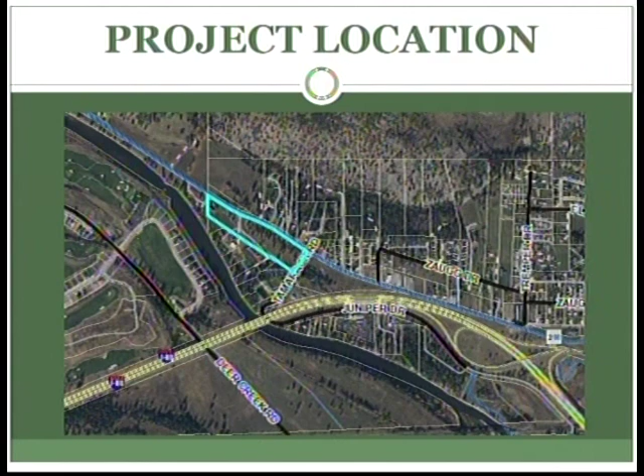We have our planning board hearing tonight, July 17th, and this will go in front of the Board of County Commissioners on August 9th. The project location is in Missoula County, out Highway 200. This would be just to the west of the West Riverside area, north of Interstate 90, and north of the Clark Fork River, as shown on the map on the screen.

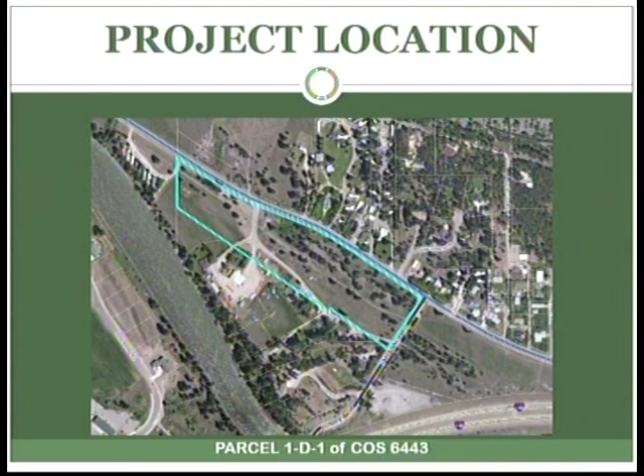Taking a closer look at the property, this is legally described as parcel 1D1 of Certificate of Survey 6443. We have just under 13 acres of property here for this subdivision. Access to the subdivision is provided by Highway 200 as well as Tamarack Road, the 2 nearest adjacent public roadways. Highway 200 is state maintained, and Tamarack Road is a county maintained public roadway located at the southeast of the property. You can see from this screenshot that the existing conditions are vacant on the property.

There has been some disturbance, as you can see. We do have Pine Grove Lane, a private named roadway that bisects the property currently and accesses some property to the south. Other than that, the primary improvements are mainly for utilities that cut across there, as well as some stock fill and material that may have been placed there associated with a construction business located just to the south of this property.

Proposed, as mentioned, is a 25-unit mobile home court subdivision. Mobile home courts do go through subdivision review. The result of this subdivision will be essentially a 1-lot subdivision with 25 units for lease or rent for mobile homes. A lessee would come in with their own mobile home and place it on the site. Because there are multiple of those on the property, it does trigger subdivision review.

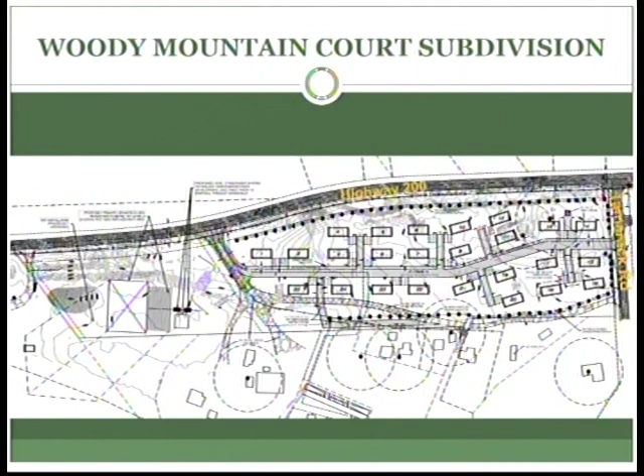Looking into the review criteria for subdivision requests, zoning and growth policy compliance would be our first one. This property is within the 1998 Urban Comprehensive Plan area, and that plan designates this property as primarily residential use at 2 dwelling units per acre for the maximum density.

There is a small corner of the property at the west edge designated as parks and open space, a pretty slim amount of the property. The rest, as mentioned, would be 2 dwelling units per acre, which is fairly characteristic with the surrounding residential development. The property is unzoned, so there's no zoning designation on it.

With 25 units on this property, it comes in at a density of 1.93 dwelling units per acre, so it's under that recommended 2 dwelling units per acre.

The 1998 Urban Comprehensive Plan lays out a framework for development patterns that says areas with a lot of community facilities can support up to 6 dwelling units per acre. Areas that have some facilities such as road infrastructure, schools, police protection, fire protection, and things like that could support up to 2 dwelling units per acre.

And then it goes down from there as you get more out into a rural nature of the county. So here we see that we do have roads adequately serving this property, and it is pretty close to local services. However, we don't have a community municipal water system or municipal sewer system located out in this general vicinity. So that's how the comprehensive plan derives that 2 dwelling units per acre is a pretty good number for this area.

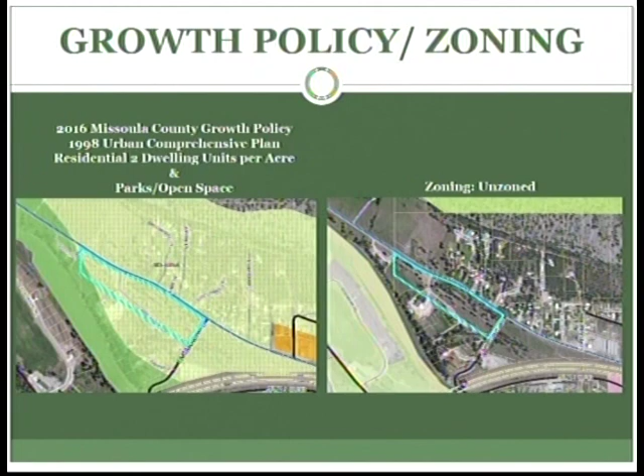Looking at ag and ag water user facilities, the site is mapped as prime farmland if irrigated. That soils information is derived from the NRCS web soil survey classification maps. There was a soil evaluation completed on the site in 1997, and the characteristics found were consistent with that NRCS mapping, that these soils could support prime agriculture.

As mentioned earlier, there is some soil disturbance on the property, so we found that some of those soils may not be the original soils on the property. It looks like there is some fill there, as well as the roads and utilities that have gone through, which have stirred things up quite a bit.

Agricultural use is currently absent from the property. We feel that it's been absent for most of the history on this property. The Urban Comprehensive Plan designates it for residential, so it hasn't been designated as an agricultural tract.

The Community Food and Agricultural Coalition, CFAC, did weigh in on this proposal. I believe they actually took a site visit out there as well, and they commented that it may have hosted a small-scale crop at some point in time.

They do have a surface water right to the Clark Fork River. However, CFAC was unable to locate any point of diversion or way to access that water, so they feel it hasn't been used in years, and the viability of that water was in question. So CFAC does not oppose the subdivision due to the lack of viable agricultural operations and their support of affordable housing. So obviously they're not too concerned with the agricultural aspect here.

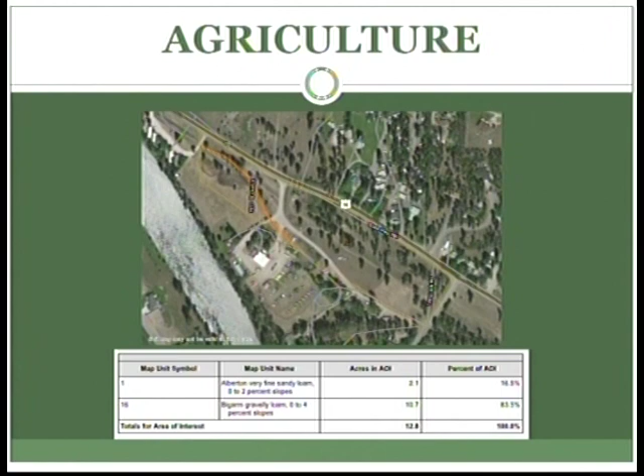We have recommended a condition of approval that puts a notification in the covenants stating that if any adjacent property or some portion of this property were ever to establish any sort of agricultural use, it at least notifies and educates homeowners that this area has been mapped as prime farmland. That's a pretty standard recommended condition that goes along with any subdivision on prime soils.

Looking at local services for this subdivision, we're going to start by taking a look into the road network that we have here. The site's located in the urban area and subject to urban standards found in the Missoula County subdivision regulations. Primary access is provided by Highway 200 and then also Tamarack Road. Those are both publicly maintained roads.

Pine Grove Lane, again, is a named private access from Highway 200 that bisects the subdivision. This drive provides access to approximately 6 properties located south of the subdivision, and that was based on a rough count from aerial imagery. I can't say if maybe there's more than one dwelling unit on a property. It could be a little bit above or a little bit below that 6 number there.

The proposed Road A, as mentioned earlier, will provide the primary access to all of the units within this subdivision. They are proposing to bring that road up to the county standard of a 24-foot wide paved surface. Then they would have a 20-foot wide access, which would take you to 2 parking spaces for each of the units. So that's all these little hammerhead style driveways that you see showing to each of the numbered units.

Mobile home park standards do allow for a road to be created within the subdivision without providing additional right-of-way or an easement for it because the property is all owned by one person. They'd basically be granting themselves an easement, which doesn't logistically make sense, so they're not required to grant an easement with the roadway. A typical road would have an additional buffer zone on the sides, and there are setbacks required of mobile homes from roadways. However, there's not an easement that follows proposed Road A through there.

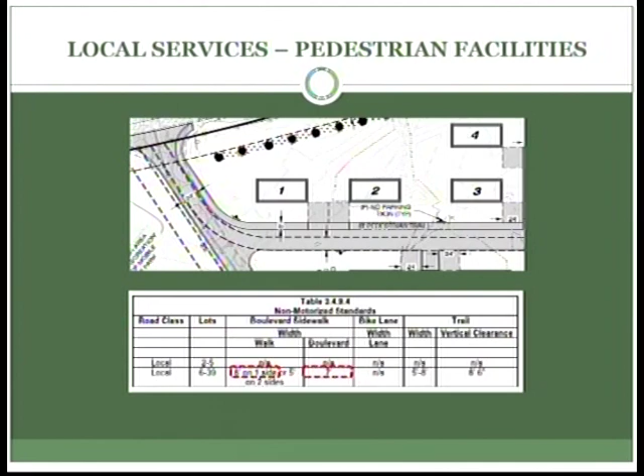The applicant is requesting a variance to the actual construction of that trail. They are willing to grant a 25-foot access easement through there if the county or by some other means was able to come in and put that trail in. The easement would be in place; they're basically asking for a variance not to construct it at this time.

Staff is recommending denial of that variance request, seeing that it does provide substantial benefit to the property owners of this subdivision and future property owners of the area, that they would have the ability to utilize a non-motorized connection all the way back to the school system, the riverfront trail system, Milltown State Park, or any employment centers back in Bonner.

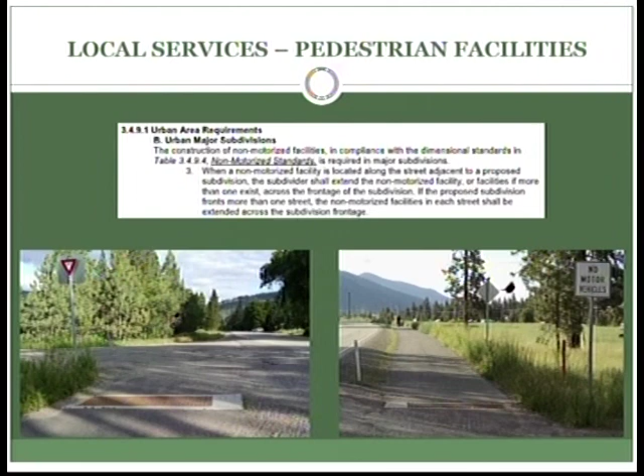Looking at water and sewer, local services for this subdivision, they're proposing a public water supply and a public on-site sanitation system. Both of these will be locally contained onto the property. However, they'll serve all 25 of the mobile home units, so they won't each have their own well and septic. They'll use these shared systems.

They're located near units 11 and 13. They're also proposing, as mentioned, this public sewer system. This would be a type 2 or level 2 treatment system to serve the 25 units within the subdivision.

Because of this level 2 treatment system and the amount of flow that's going to go through it with 25 mobile home units and the proposed rates they would push through there, they do need a groundwater discharge permit, which they currently have. The actual sanitation system itself will have to go through local review, sanitation and subdivision review.

For the COSA rewrite of this property, it's currently approved for a single-family dwelling, I believe. So they'll have to go through that process with the City County Health Department to approve this facility. The City County Health Department mirrored that comment, that it needs to go through that process still.

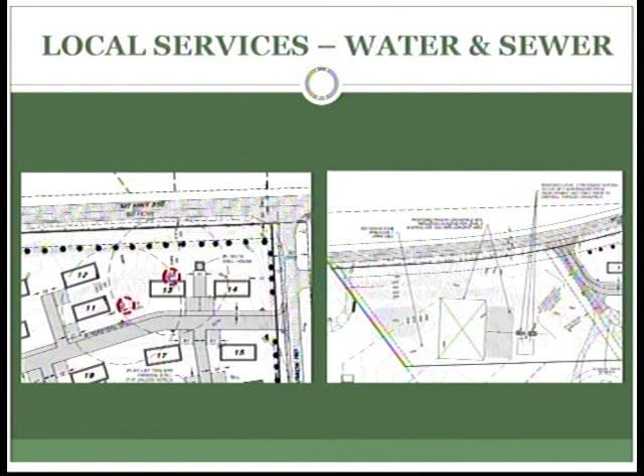Looking at the information provided in the application, we feel that there's adequate quantity and quality for the water system, and that the sewer treatment system, sanitation system, for this property will provide adequate treatment as to not negatively affect nearby wells or groundwater. I think groundwater is 50 or greater feet below the surface at this property, so there's pretty good separation here before you hit that.

Looking at the Parks and Rec aspect of local services, the majority of this property will be in what's referred to as common area. Mobile home court subdivisions are required to provide 1/9 of the property area in parks or common area, as it's referred to here. So that would be 1.44 acres.

This subdivision is proposing 9.92 acres, so the majority of the property is going to be open. Everything in green there is shown as common area. They are proposing common area 1, which is shown over top of the drain field area here on the left-hand side, to be utilized as active recreation area.

The applicant has proposed to grade that out to less than 5% grade to support active recreation if kids wanted to go out there and have a ball game or whatever it may be. The subdivision regulations require areas of active recreation to be graded to 3%. So we've made a recommendation that an area totaling 1.44 acres be graded to 3%. We feel that's what the subdivision regulations require, and that's adequate space. And we feel that could be accomplished fairly easily just based on the topography over there.

Looking at the natural environment, wildlife, and wildlife habitat, I've thrown this shot up just to give us a little bit of context in terms of where this property lies in relation to surrounding development.

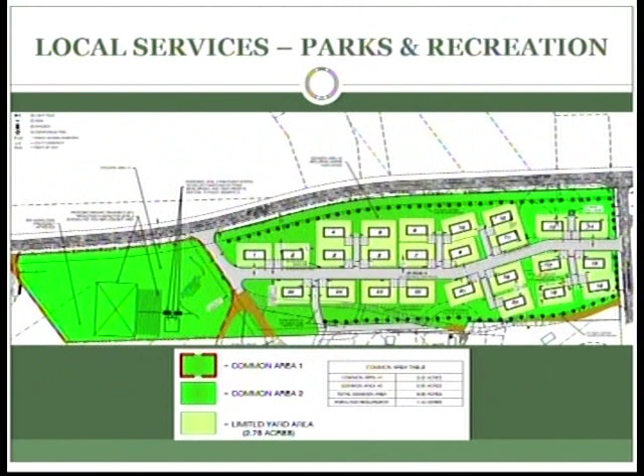And just to jump back a second, I apologize, I skipped it over with local services - we feel that there's an adequate school system in place to accommodate the estimated 12.5 school-aged children resulting from this subdivision. And Missoula Rural Fire District is going to be serving this property from their nearest location, 2.5 miles away. The road network meets or exceeds their standards of access requirements to each unit within the subdivision.

And the applicants proposed a fire hydrant as their water supply for fire suppression. We've recommended a condition that it be reviewed and approved for location and flow by Missoula Rural Fire District prior to final plan approval.

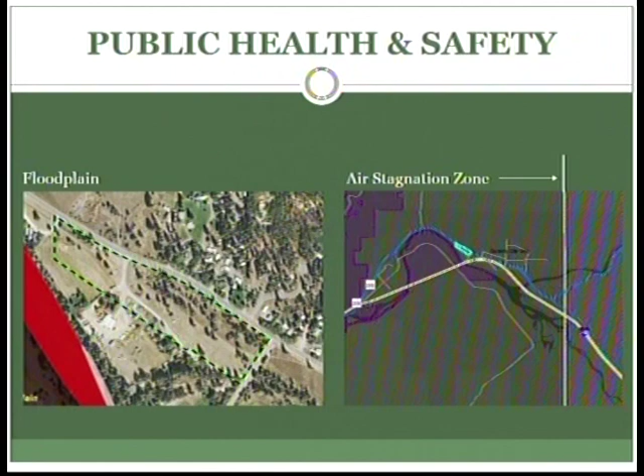Looking at compliance with survey requirements, the applicant has provided a preliminary plan that complies with those requirements. Looking at subdivision regulations and review procedures, there is a specific section in Chapter 4 of the Missoula County Subdivision Regulations that addresses mobile home courts. The applicant has addressed most of those with their preliminary plan.

We are recommending some final plan checklist items, things we'll look for when they come in, just to make sure those improvements have been completed. Some of those would be setbacks of mobile homes from the roadway, and a visual screen or buffer along the perimeter lot lines to any neighboring residential development. They have proposed that on the preliminary plan, to basically surround the mobile home portion of the development, and that the developer would install the actual pad sites for the mobile homes.

So either a gravel or paved pad meeting a minimum dimension of 14 feet by 70 feet, and I believe they plan to do it at a scale even larger than that to accommodate a double-wide type mobile home here.

As mentioned, we did receive 2 comments from adjacent property owners that are included in the staff report as part of the subdivision regulations and review procedures. It was sent to adjacent property owners through certified mail. The property was posted in 4 locations with posters approximately at each of the corners of the property, and a legal ad was run in the Missoulian on 2 separate occasions prior to today's hearing, as well as the Board of County Commissioners hearing in August. The subdivision is proposed in 1 phase.

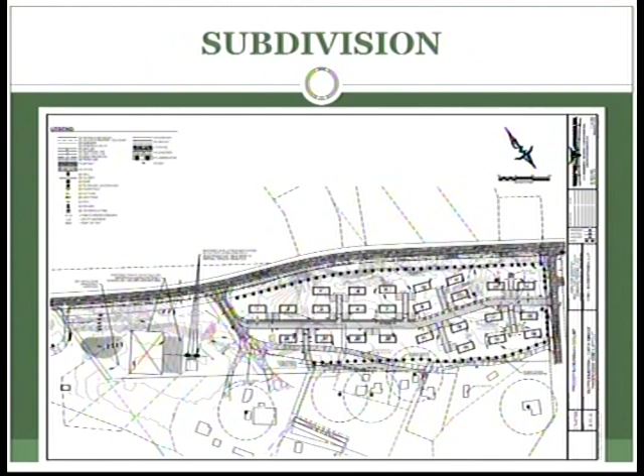So this would be a full shot of that preliminary plan that you have in your packets, showing the 25 units and surrounding development on it.

Circling back to staff's recommendation found in the staff report, starting with the variance requests: staff is recommending approval subject to one condition, to relieve the applicant from creating the 7-foot boulevard between the pedestrian facility along proposed Road A. The condition of approval there was to raise it 6 inches and stripe it to delineate that pedestrian trail.

The second variance request, staff is recommending denial, to alleviate the applicant of the requirement of constructing the pedestrian trail along the Highway 200 frontage. So with denial of that variance request, they would be required to install those improvements for the full extent of the property.

And the third variance request has to do with the road standards for Pine Grove Lane, those relocated portions, to allow them to be 20 feet in width as opposed to the 24-foot wide as established in subdivision regulations. And with those variance requests and all the findings of fact in the staff report, staff is recommending that the Woody Mountain Court subdivision be recommended to the Board of County Commissioners for approval, subject to the conditions found in the staff report.

And that concludes my presentation. Happy to answer any questions.

Thanks, Casey. Appreciate it. Does the applicant or the applicant's representative wish to speak at this time? He does. Mr. Forsting?

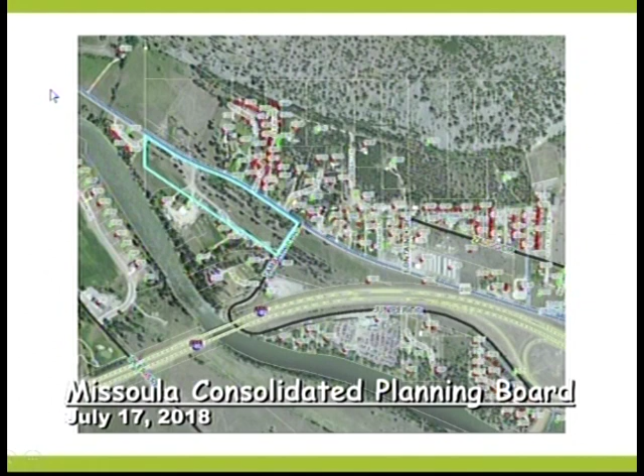There we go. There's several mobile home courts around here. We'll start over here: this is Grile Loop, and this is aptly named Grile Mobile Home Court. There's 8 units there, and that's Bob's adjacent property, one of his mobile home courts. There's a couple larger mobile home courts across the way here—one is Tamarack, I don't know the other names.

There's actually several of them. There's a larger one further east here, and Bob's other court, the court that we're modeling this project after, is Newcastle Court, located east of the property off of Juniper Drive. Let me show you what that looks like.

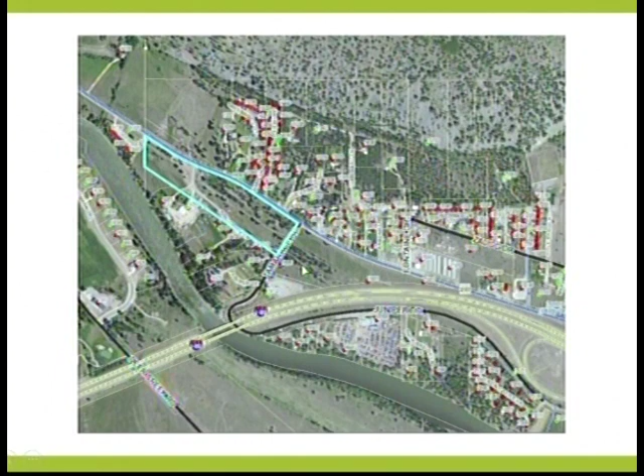This is what the park looks like. You'll see it's very similar to how we've got our park designed. This is a 24-foot road, and when it was approved, that was sufficient for a roadway and a 4-foot walkway, so that's what they were approved with for pedestrian facilities.

That road looks like this. Bob can tell you how that's functioned - he hasn't heard of any conflict with it. It's worked great, folks walk down the street, the traffic's low volume. There's 24 units here; we'll have 25, so one more.

You can see they have these same kind of stem road networks here, and I'll show you what that looks like in reality. We've got the same concept where we've got common area. Nobody's allowed to put up a fence. When we talk about limited common area, it's kind of their area - you'd go put a chair down there and feel like it's yours, but it's not fenced off, and you can make your way through anywhere on the site.

That's the same theme we're going for with our project. Here's a blown up version, and here's one of those stems - I call them stems, they're actually roads. That's a road here, and we've got a couple units accessed from behind there. Again, this is a 24-foot road. We're going to be doing a 24-foot road with an 8-foot attached striped walkway, and I'll show you what that looks like. You can imagine this road plus 8 more feet is what meets the minimum requirements with our variance.

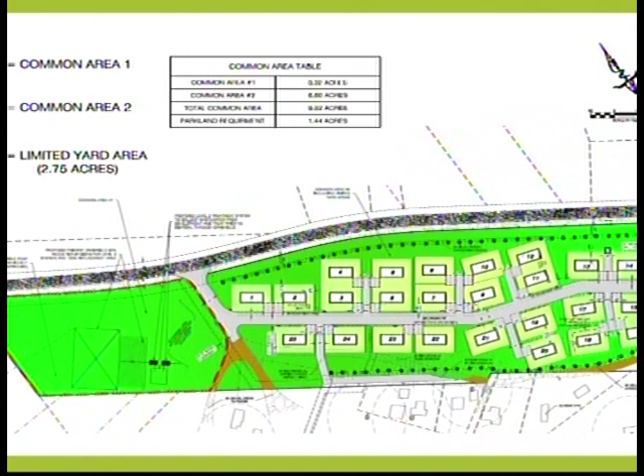Here again is that common area schematic that Casey showed you. We've got the open concept - there'll be no fences between here, so folks can get to the park and from. They'll be able to walk along that road, which has got a striped 8-foot walkway.

Here's what the park actually looks like, that section on the western portion of it. This is what it currently exists as - Bob's actually got some better pictures today that unfortunately aren't in digital format, but this is what it looks like. It's pretty flat, and we don't think we'll have any trouble meeting that 3% graded requirement. It's a larger area, so this is what that park area will look like.

This is what I've had a lot of questions about - we're going to put our drain field in that park, and there's been a lot of questions from folks I get on occasion in meetings like this. Hey, how unusual is it to have a drain field in a park? What is that going to look like? Is that going to cause a problem? So this is what Newcastle Court's drain field looks like - aside from some weeds being on there, it's pretty nice.

Anybody who lives in a rural area has got a drain field in their backyard, and their kids are out there playing, generally right next to their tank or close to it. It's not uncommon to be in common areas. This is one at Mountain Meadows down in Florence, a system we used to operate. Those are the actual tanks for treatment, and the drain fields are in that field. So that's what a common area with a drain field looks like - it just looks like an open field, and people use it as such. So it does come up on occasion, and if you had any questions, that's what it looks like.

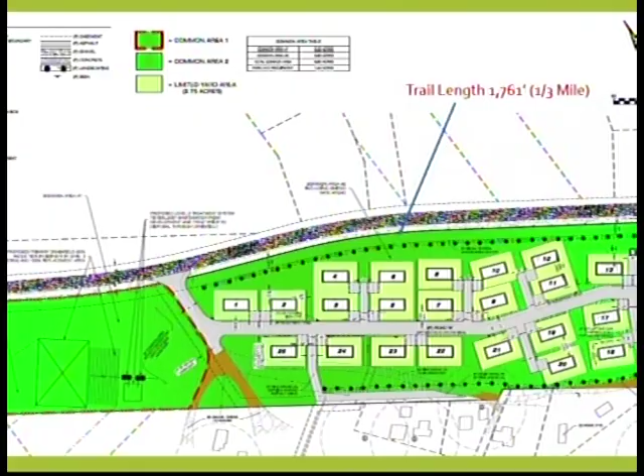Bob was actually working over the last couple of years with the folks who were looking to build that trail, and he said, 'Hey, I'll give you my land here, build a trail.' They started designing it, and as you get further out towards Marshall Canyon Road, it gets super difficult. The grade is incredibly difficult - I've got some pictures to show you - but there's not a really good design for getting around that area. And there's no users on our side of the road past Bob's adjacent 8-unit mobile home court.

So the folks who were designing that trail and looking into it stopped their plans and said, 'We're just going to stop here, we're not going to go any further because of the complications that it creates.' I can completely understand that - I like trails and think they're a great amenity - but when you look at the ability for the residents here and the adjacent residents at Grile Court to go into the common area and make their way through the site to get onto that trail, I don't see not building a trail as an impediment. And it's going to be very difficult to build if we were required to do it.

Here's that section of the road where something significant would need to happen for it to ever get around this corner. This is Marshall Grade, or Marshall Canyon Road. We have a creek and the river on the other side. That'll be a significant investment, and there's a power line there too - it'll be a major undertaking. It got bumped down the priority line, and I'm not sure how far, but it'll be a major trail whenever that goes in. So we don't see it happening soon.

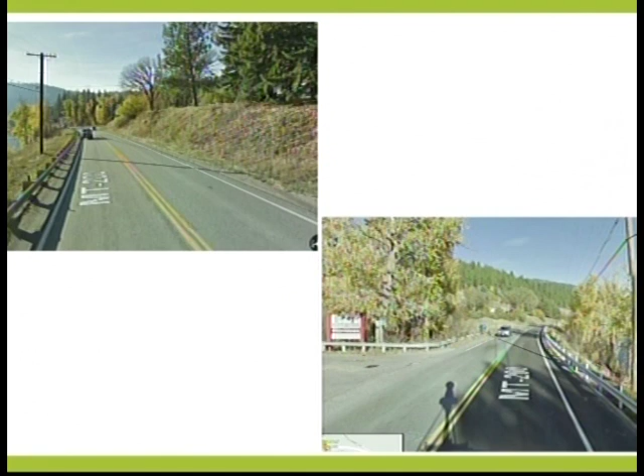That being the case, we're optimistic that you'll understand why it's complicated for us - if we had to do that, it would be a very difficult component of the project. Here's what that trail would be going through on our property.

If you look at that, the right-of-way takes up all of the flat area, and then we go right into some significant mature trees - that's the path. We have a nice buffer from Highway 200 on our site from existing vegetation. That trail would require significant clearing of all that vegetation, and there's varying grade in there, so it'll be difficult.

Here's a picture - on your left is kind of the existing entrance where Pine Grove Lane comes in. You can see you get into that really vegetated area soon, with some varying topography. And then I wanted to show you the picture on the right.

That shows Bob's Grile Mobile Home Court, his adjacent property to the west there. And it shows how there is an existing grade, a railroad grade that basically functions as a trail right now, a gravel trail. It goes right through our common area.

It'll provide sufficient, it has provided and will continue, it'll be in a common area. It has provided sufficient ability for people to get through the site. Bob's comfortable with letting everybody at Grile Court know, hey, this is a common area. We talked about putting in a wooden sign.

We get a lot of these common areas out there, and if they don't put a sign in, who knows what it is, unless you're a guy who can read plans and whatnot. But I know as a kid, if there was ever a wooden sign that said park on it, I was going to occupy that space. So we talked about it, just to make it more of a known thing. And once that sign goes up, every kid in the area is going to know that's a park, and they're going to make their way through it.

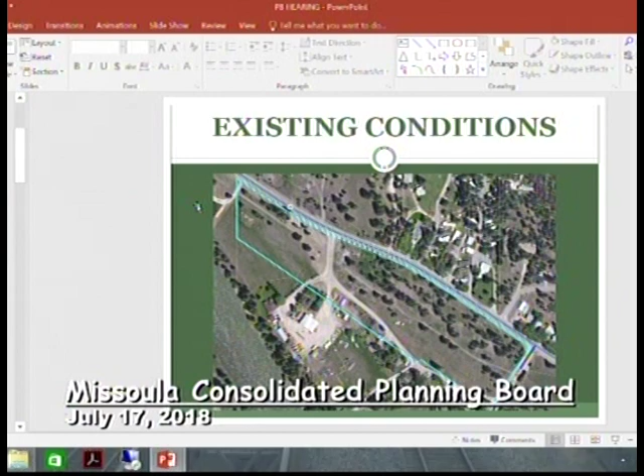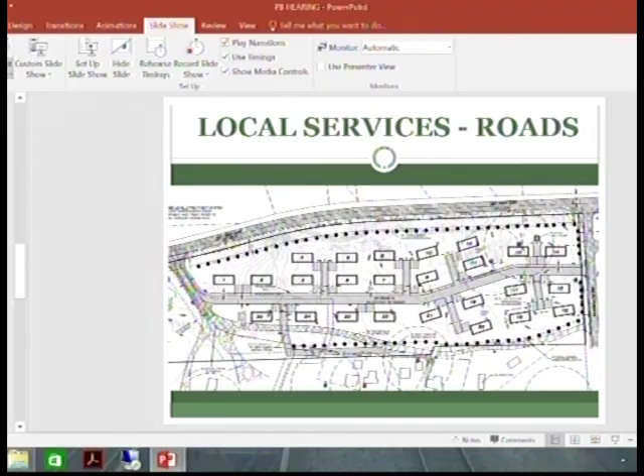So she recognizes that her vehicles, as they're currently parked, may even overlap on where the new Pine Grove is going to be rerouted. If you can just mentally take a picture of these right here, and then I'll go back to here, at least that kind of shows it. So we're talking about those areas, right in this area, if I'm getting this right.

Bob's been more than willing to let her keep her vehicles there, it hasn't caused a problem. He doesn't have a fence there now. So maybe they even will still fit, I guess, the way I see it. I'm not sure. And that part of the road is going to be paved, is that right? Correct, yep, absolutely.

Paul, what's up with the landscaping there? Is the landscaping separating access to people's homes there? You're required to have landscaping between mobile homes and residential. Right, and Bob wanted to do it anyways, he thinks it's nice. But on the eastern part of the site—are you talking about the eastern part right here? Just right where we were looking. There's a line here.

So this is where the road was, and this is where it's going. Oh, I see. So there'll be a landscaped buffer between that road and those neighbors. Okay, yep.

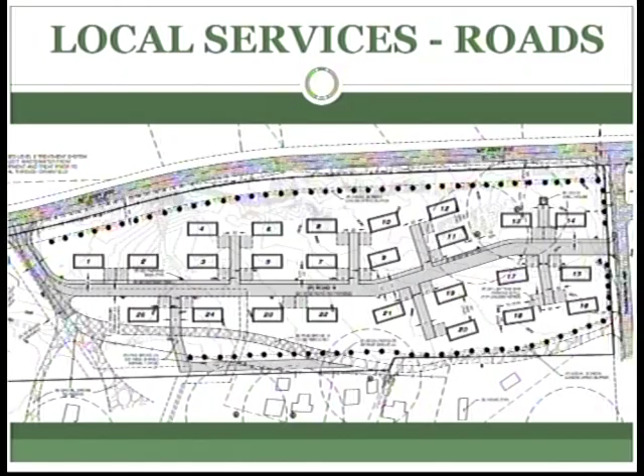I would make a motion—go for it. I think, tell me if I'm wrong, but my inclination is to make a motion to amend the variances on number 1 and 3, and I could propose those individually and see if there's a second on that motion. And then, to keep it clean, Casey's request is that instead of amending 3 to include Road A, we just do a 4th, and it can mirror variance number 3. If that would be a preference, then my thought is I would make 3 motions to amend these proposed variances on 1, 3, and 3A, if you will. And if there's a second in support of that, then there would be a vote on the subdivision approval with conditions.

So I would make a motion that we amend the proposal for a variance request from the requirements to construct a 7-foot boulevard and boulevard sidewalks for the on-site non-motorized pedestrian trail along Road A. Effectively, the amendment is just adding a variance to eliminate the boulevard sidewalks and the boulevard, that's the effect of the amendment.

Okay, and then, is there a second to that? I'll second that—seconded by Helen. Okay, we'll have discussion on the motion at this point. So with that change to the variance, that gets rid of the condition of approval that's under variance number 1 that we talked about earlier. We were going to have to make sure we remember to include it in the final conditions of approval.